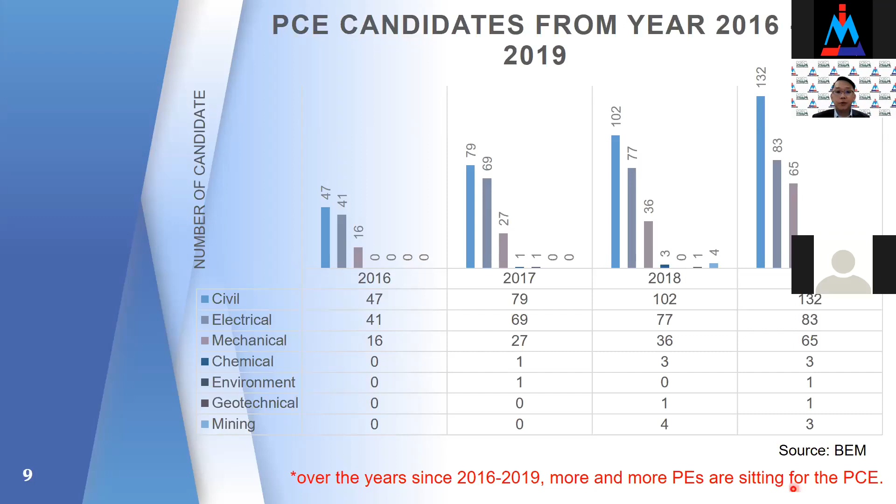Let's look at another set of statistics for the civil PE who passed the PCE based on year. On average, we can see that the passing rate is around 12% based on the results for the past 4 years, namely from 2016 to 2019.

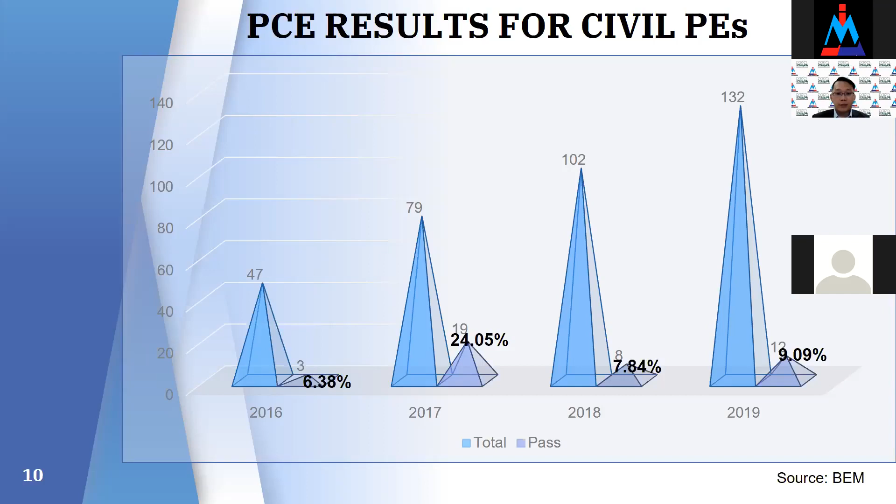That was a very quick introduction to the PCE. Now let us focus on the format and structure of PCE. To sit for the exam, we should fully understand the format and structure. There will be 2 parts in this examination: Part A, the common paper, which is sat by all disciplines, and Part B, the technical paper, specific for the civil and structural PE.

There are 2 papers for each part. Paper 1 has objective questions, and paper 2 has subjective questions. The same arrangement applies for Part B. Candidates need to pass both paper 1 and paper 2 in one sitting. However, the PE can sit for Part A and Part B together or separately. Please be reminded this is an open book exam, but handwritten and loose notes are not allowed to be brought into the exam hall.

This is further detail, a breakdown on the PCE Part A and Part B. The question arrangement is exactly the same for the common paper Part A and the technical paper Part B. For paper 1, there will be 1.5 hours to answer 40 objective questions, and the passing mark is 50%. My recommendation for the 90-minute arrangement: allow 10 minutes to recheck your answers, 10 minutes to revisit difficult answers, leaving 70 minutes for reading and answering the 40 questions, which equals 1.75 minutes per objective question.

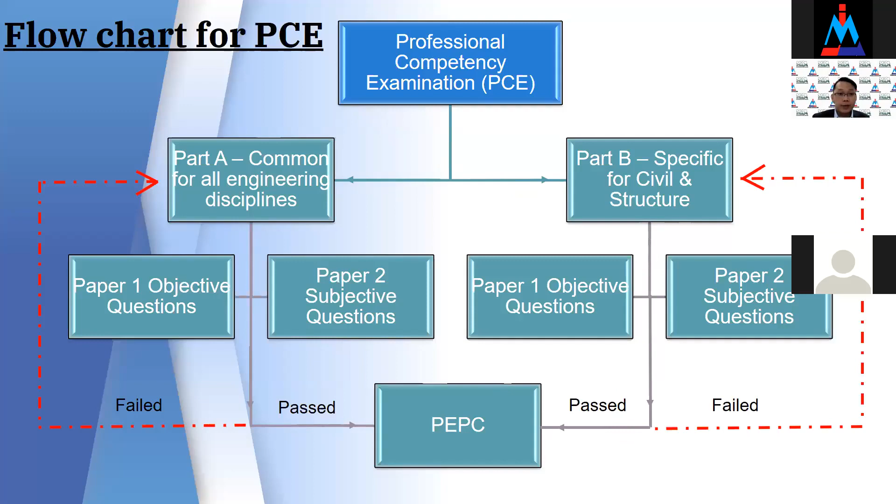Let's see this brief flow chart for the PCE. The passing for Paper 1, Part A and B, is actually independent for Part A and Part B. However, in order for you to succeed and pass the PCE for PEPC, you have to pass both Part A and Part B together. So this is just a quick intro for the format and structure for PCE.

Now we will spend more time on the common paper and the technical paper for Part A and Part B of the syllabus. Let's go through it.

After understanding the format and structure for PCE, let's look at the Part A common paper syllabus. This common paper will test the candidate's knowledge of the laws governing the professions, the responsibility of the profession towards the general public, and the status of professionalism and ethical behavior. There are 7 areas that the candidate needs to be aware of and prepare.

First, the law and regulations governing the engineering profession in Malaysia. Second, engineer's responsibility to society and the public. Third, professionalism. Fourth, knowledge of laws having relevance. Fifth, knowledge of contract laws in Malaysia with respect to the construction industry. Sixth, in-depth knowledge of the functions of the consulting engineer during the various stages of project implementation in accordance with the PAM Model Form of Agreement. And last, the management of the ECP.

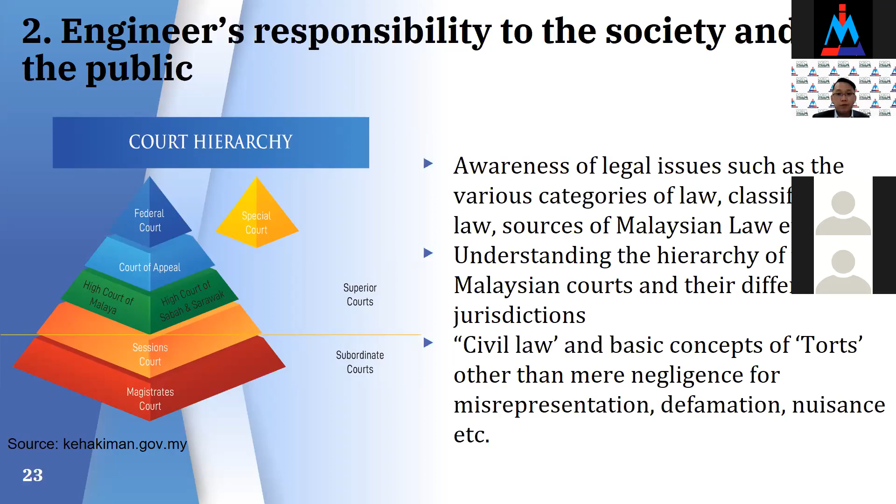In the Registration of Engineers Act, Section 8(1), it is stated that only the PE or ECP shall be entitled to submit plans, engineering surveys, drawings, schemes, proposals, reports, designs, or studies to any person or authority in Malaysia. Hence the professional owes a duty of care.

This duty of care means the standard or level of expertise and due diligence, especially under tort law, for the requirements of the UBBL to the local authority. I believe all PEs should be familiar with the CCC, CFO, OC, and OP.

Cross-reference to other laws in Malaysia has to be made during submission of the plans. This includes, but is not limited to, the Local Government Act, the Town and Country Planning Act, the Street, Drainage and Building Act 1974, the UBBL, Earthworks bylaw, Environmental Quality Act, Factory and Machinery Act especially the BOEC chapter, the SPAN guidelines, SPAN regulations, CIDB Act, and so on.

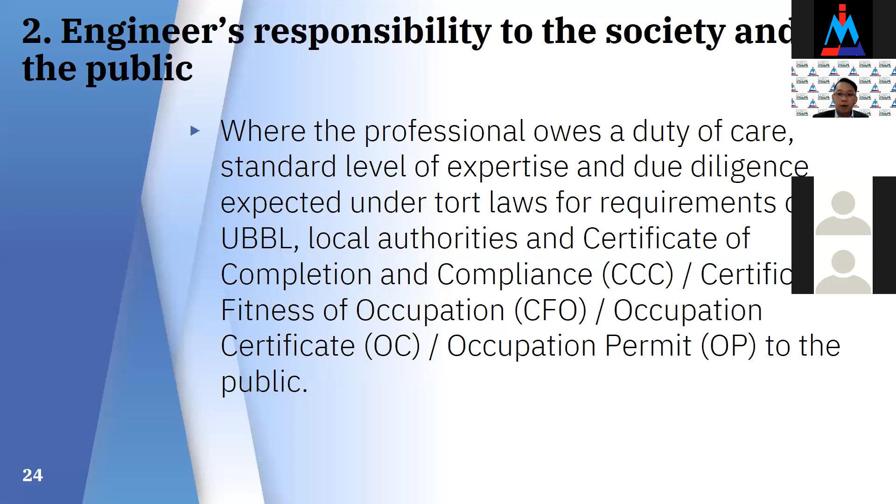There are many more besides these. The sitting PE shall have knowledge of the above laws and acts and practice accordingly.

Subsequently, to submit engineering plans and become a PSP, the Principal Submitting Person and the Submitting Person shall be the PEPC, and must well understand the submission process requirements under the rule of law.

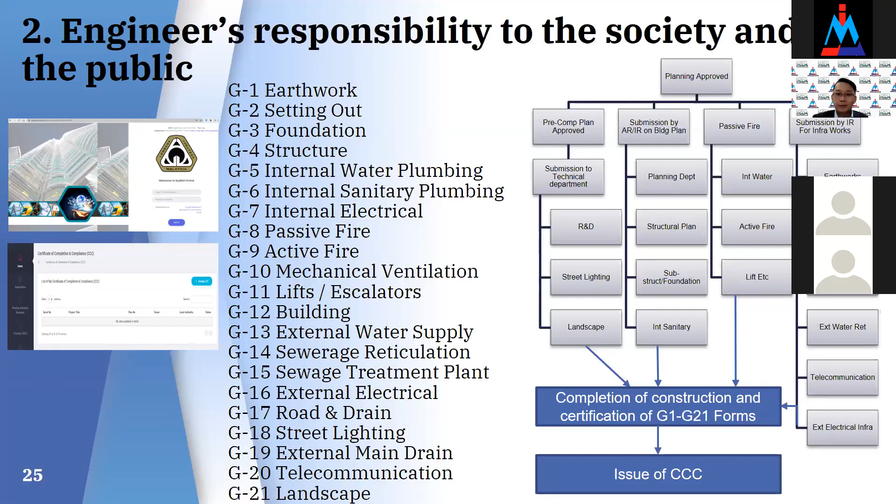Again, on the engineer's responsibility to society and public, he shall be aware that his design liability works within the following factors: risk, factor of safety, code of practice, limitation of the act, and the difference of liability based on reasonable skill and care.

This is a very heavy phrase here: fit for purpose. A reasonable understanding of professional responsibility pertains to the duty of care and due diligence to the client under the contractual and tortious relationship. That's about the second topic.

So let's move to the next topic, professionalism. For the four key concepts of professionalism, we have public interest, client interest, code of conduct, and expert knowledge.

First, on public interest, the work conducted by the PE shall not be deemed injurious to the public interest; that takes precedence. Second, on client interest, a PE shall always hold in trust the interest of his client and treat it as his own interest.

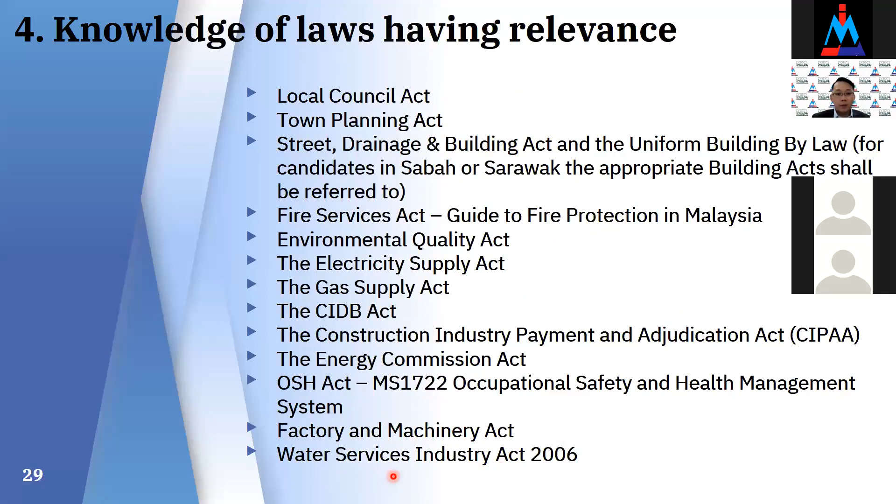These include, and are not limited to, as I mentioned before: the Local Council Act, Town Planning Act, Street and Drainage Act, Fire Services Act, Environmental Quality Act, Electricity Supply Act, Gas Supply Act, CIDB Act, CIPAA, OSH Act, FM, BOEC, and the Water Services Industry Act 2006.

The next topic covered under Part A is contract laws in Malaysia. Handling contracts is unavoidable for a PE, whether it's his own contract with his client or handling the project tender and contract. The basic concepts of contract law are covered under the subjects in all the bullet points here.

Here I need your attention on a recent topic very relevant to contracts, that is the COVID-19 situation in the country. Essentially, due to this pandemic, COVID-19 has created somewhat of a frustration to contracts. I believe the PEs attending today should have some experience with it.

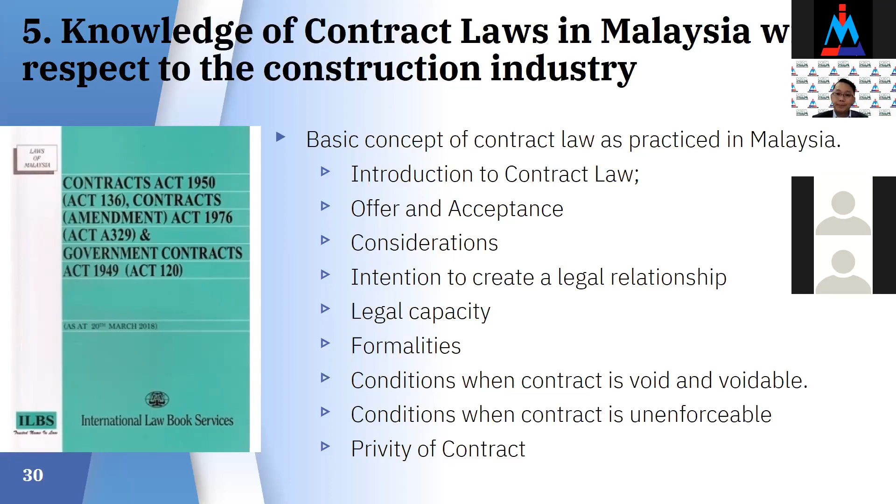Apart from that, a PE shall be familiar with different types of construction contracts, so he is able to understand the differences among them. Only then will he be able to advise his client on the appropriate contract to adopt for his project. The various types of contracts currently practiced in Malaysia include the direct contract, nominated subcontract, direct subcontract, turnkey contract, and design and build contract.

The forms of contract we use include PAM 1998, PAM 2006, JKR 203, JKR Design and Build, and FIDIC. For the FIDIC books, we generally call the FIDIC white book the consultancy contract, and the FIDIC red book the construction contract.

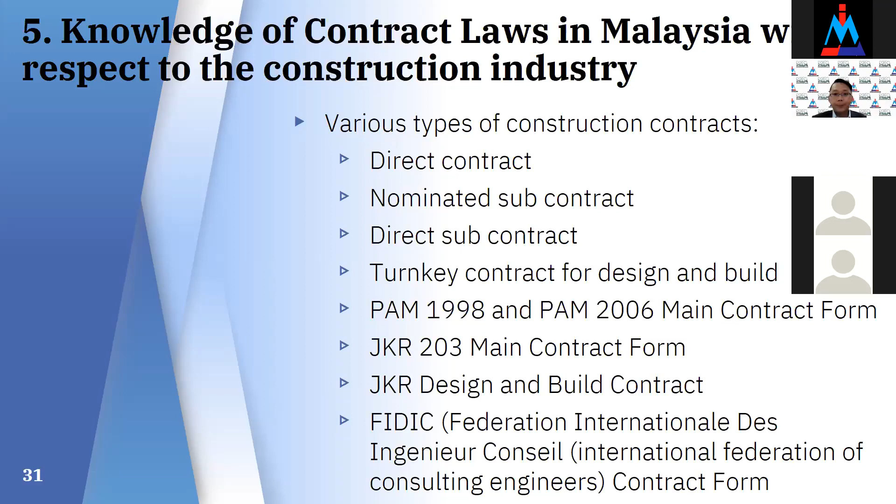Okay, here this will give a summary on the different types of contracts. This is just a simple summary amongst all the different types of contract. I won't go into too much narrative or elaborate detail, but I just want to go through one example.

Say for example, we're talking about the contract for turnkey and design and build. Particular to turnkey and design and build, we can see that on the consultants side, it will be one advisory consultant on board for the design and build project. Contractors, normally we will have one D&B contractor. On the appointment of the consultants, it will be appointed by the contractor, as contractors will bear, in the sense, in the case for design and build, the design warranty.

On item C, the client's expertise required, as you can see across Romans 1 and 2, on the client side relatively only low skill is required, because most of the items will be covered under the design and build contractor.

For the project cost, normally this will be the highest cost for design and build. The type of project, this will be very relevant for large scale projects like railway projects implemented in the country, and it requires special proprietary technologies.

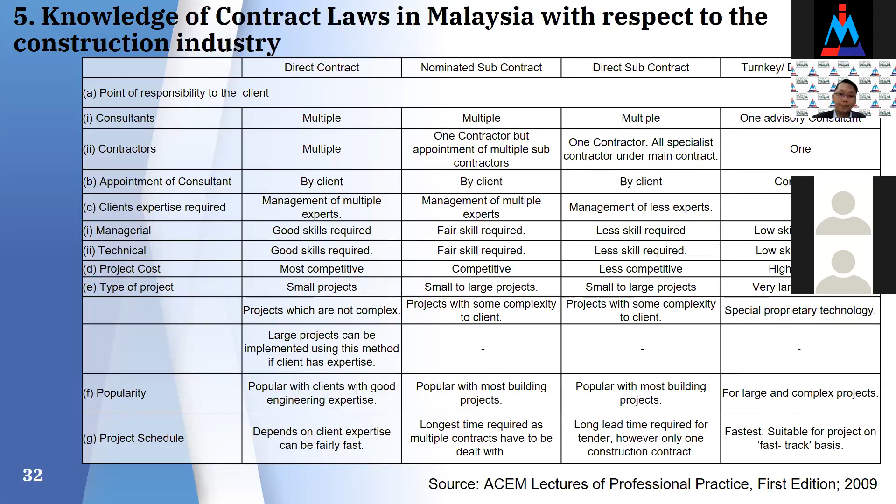Next, we will discuss the function of the consulting engineer during the various stages in the project. When we implement the project, for the consulting engineer, it always starts from the feasibility and preliminary stage.

Then after, we will enter the design stage 1 and 2. Upon finishing the design, we will go to the tender stage, then prepare all the tenders and call for contractors. After this, the tender stage, we will go to the construction stage and the post-construction stage. For the detailed scope of work in each, from Romans 1 to 6, the candidate can refer to the BEM Scale of Fees 1998.

The BEM Scale of Fees 1998 outlines the basic professional services for the various stages shown above. It's worth mentioning that currently there is a BEM working group in the midst of reviewing the revised BEM Scale of Fees 1998, and some amendments are proposed. Hopefully all the PEs, today's PEs, have some knowledge about it and heard about it before. I recommend the candidate put some attention to it and observe the latest developments on this revised BEM scale of fees, the upcoming change.

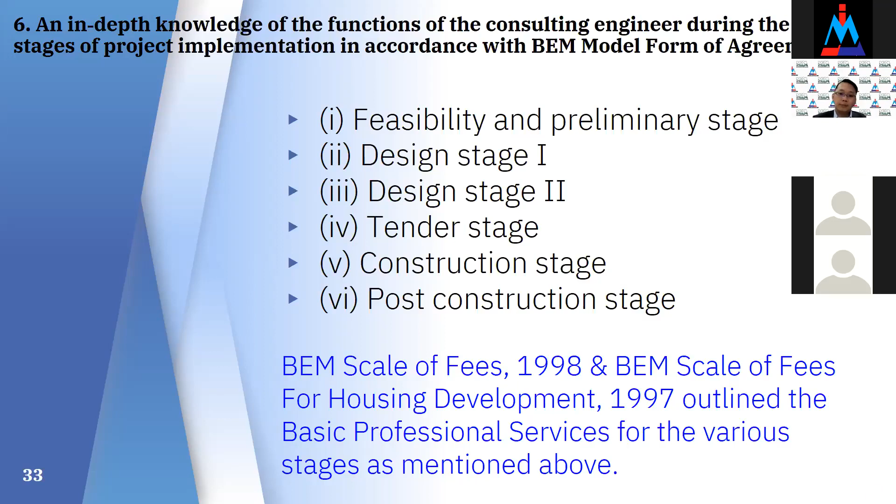This is topic number 7, management of the ECP. This area of concern will be more advantageous to those PEs who are now at management level in their consulting engineering firms. The PE shall have good governance practice in accordance with company acts and regulations, awareness of the implications of penalties involved for violations of intellectual property, methods of charging professional fees and reimbursement items to the client for services rendered in accordance with the revised BEM scale of fees, and basic knowledge of local labor law.

So if you are already at a certain management level or are an SCP, ECP, this will be very relevant to you, and these are the items that you can try to capture.

Now we bring the summary for the weightage of the PCE questions for Part A. On the Part A questions, summarizing for papers 1 and 2, the weightage for Engineers Act and professional practice takes 35%. For common law, local acts and local authority, it takes 30%. Construction and contract laws take 25% by weightage.

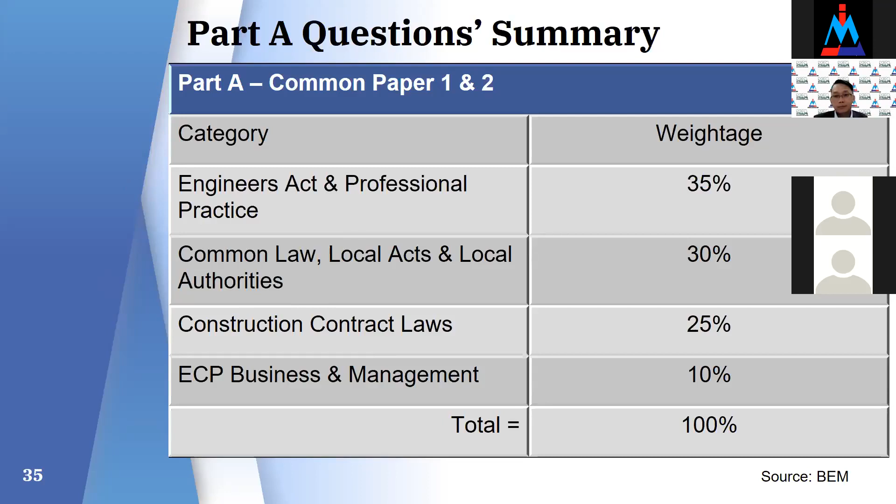The candidate can answer in point form and should try to avoid beating about the bush. Just go straight to the points and write out the answers on your answer sheet. In actual fact, you won't have too much time to spend on a long, naggy answer, so please try to keep it short and simple.

Okay, with that, I think we have gone through this common paper. Now let's cover the second part of the syllabus paper, Part B.

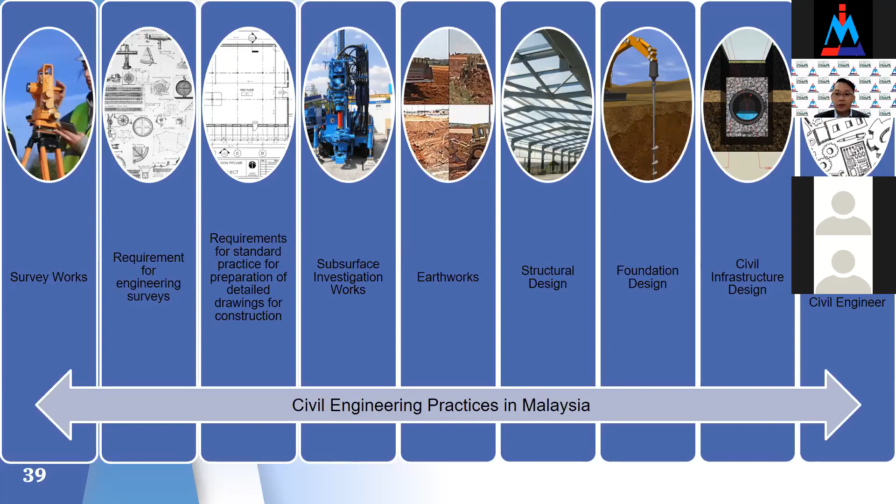First, looking at survey works and the requirements for engineering surveys, almost all projects will kick off with survey works. It's so important for a PE to know the procedure to provide the term of reference for the survey works. All the survey outcomes and results shall fit his design and intentions to carry out the designs later on. Most of the time, if the TOR is not clear enough, we will have to go for the survey works again and again in order to have sufficient information for the design works.

For the survey works, we also have to identify the survey corridor required within your project, the ROW, the right of way, and the type of information to be picked up by the surveyor. Without a good and well-defined survey scope of work and results, it will be very hard for engineers to carry out design, especially for civil infrastructure projects.

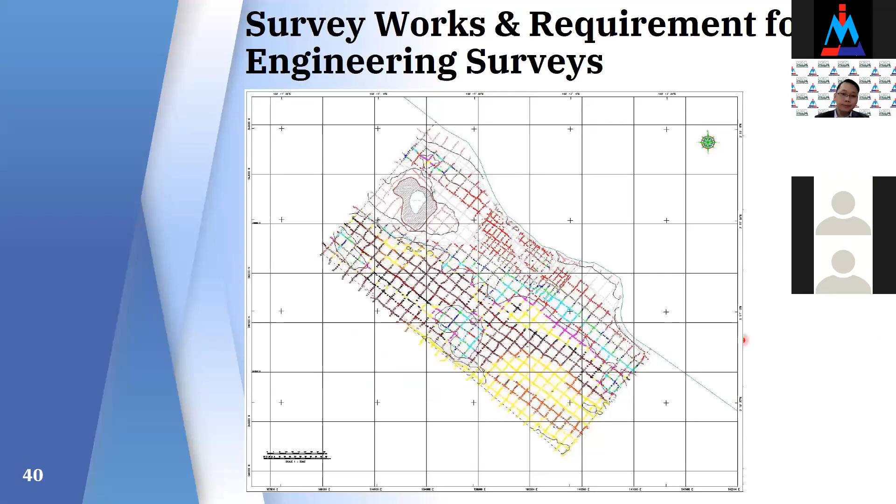Next, the second area is the requirements for drawing preparation. I don't think I need to elaborate too much, as the preparation of drawings for construction, for submission, and all this is a compulsory skill for all PE - the ability to produce drawings. The engineer shall be able to cover and convert his design from the sketchboard to drawing production for site construction consumption.

A good drawing should have the correct scale and be legible when read at A1 size and even A3 size paper. As we see normally at the site, we're just using A3 size paper for construction, so the drawings have to be made legible even in A3 size.

You will have these details, the technical notes in your drawings, the sufficient cross sections for reference. This is quite important when you prepare for your detailed drawing for the constructions. Most of the time the engineers just simply have a plan and one cross section, not enough cross sections, especially for the difficult details. This will let the contractor on site guess, because they have limited cross sections to understand your drawing, your design. This brings some hiccups and hazards to the construction time.

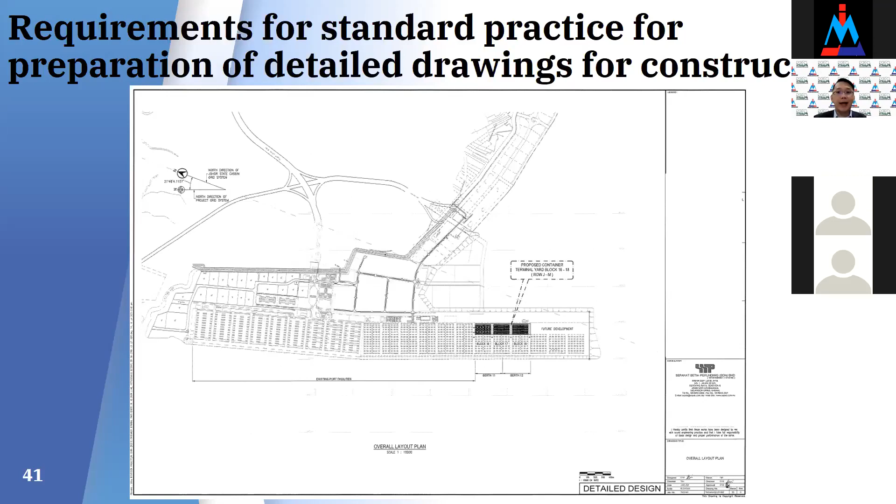On the technical paper, another part you will see is the subsurface investigation work. The third item, after the first one, is subsequent from the previous survey works - we have gotten the survey plan now. The next is the rollout of the SI works. For the SI work, the engineer shall know the ground conditions. It does not matter whether you are a geotechnical engineer, a structural engineer, or an infrastructure engineer - the engineer must know the ground.

Our engineering works is either to build below ground or above ground, hence it is imperative to know the ground condition. For the subsurface investigation work, it starts with the planning of the SI works, which includes the filling works on the embankment, the platform on soft ground, the cut and fill in hillside development, road works on hilly terrains, the earthwork foundation cut and fill on good flat grounds, the foundation design - be it shallow or deep foundations on soft ground - considerations for foundation design on hillsides, foundation design in limestone areas, and the planning.

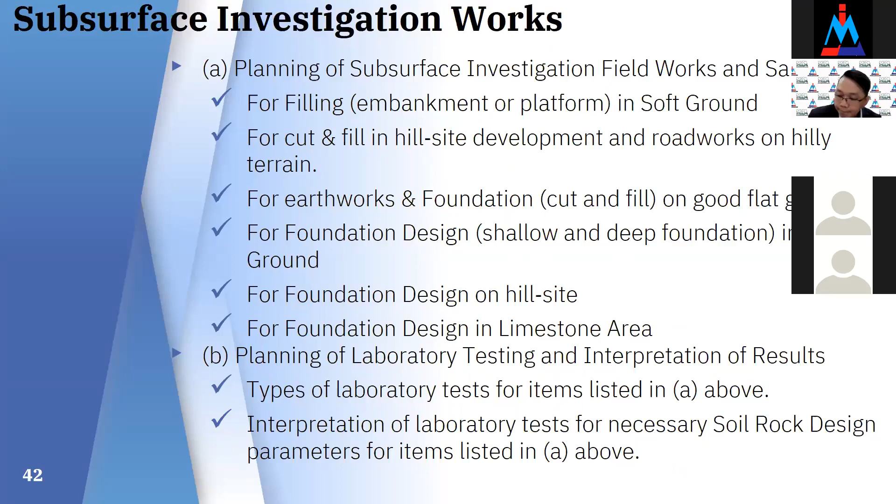Subsequent from the previous, we know we need to have the planning for the SI for our works. Here I want to take one example for the planning of the subsurface investigation field works. As you can see from these plans, this is a road development project for infrastructure projects. We will try to roll out the planning for the SI for the design in the later stage. For the boreholes, we will plan the borehole locations, and then determine the vane shear test, the cone penetration test, then plan the high embankment field site.

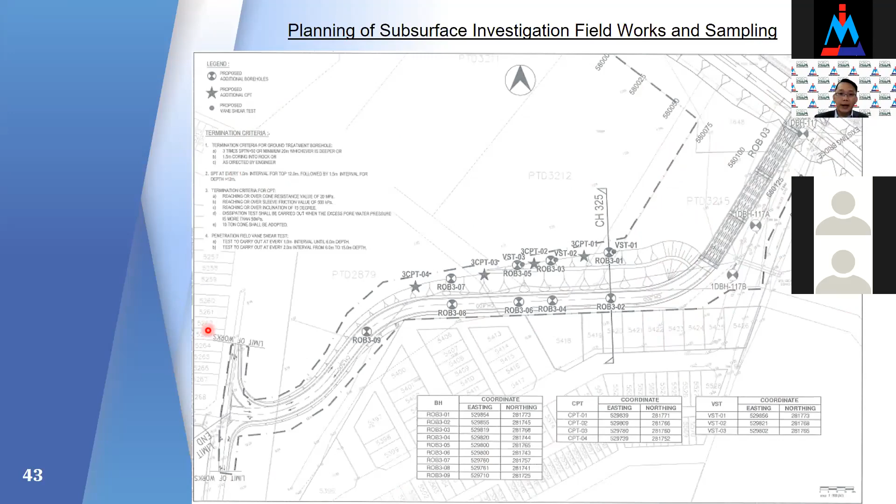And then on the bridge structures here, we have the planning on the SI boreholes, in order to gain and obtain sufficient ground information for the design - for the high embankment geotechnical design, earthwork design, as well as the rollout of the subsurface investigation works for the bridge structures. So this is a good example of how we try to plan our subsurface investigation works.

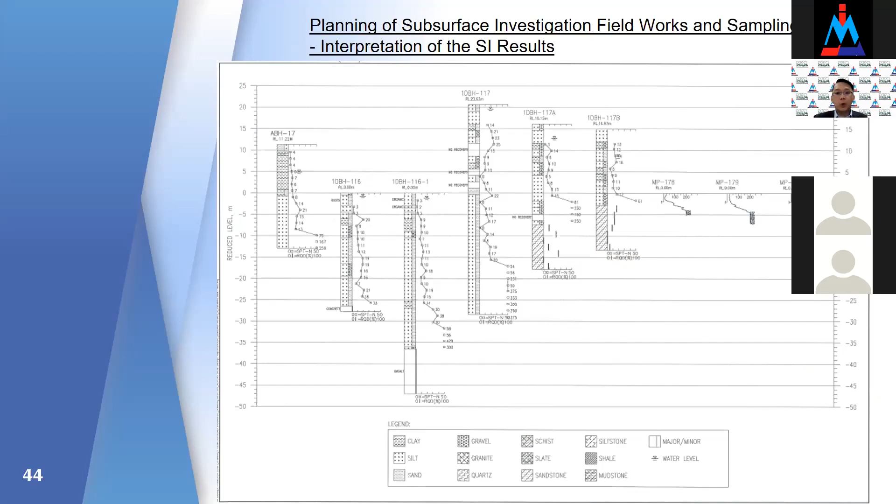After the planning and implementation of the subsurface works, the SI results have come back. From here, this is the standard and common borehole log information. The engineer shall have the ability to interpret the SI result accordingly. In this case, the candidate engineer needs to have the ability to understand and read the borehole results correctly. Apart from that, once the laboratory results are received, the engineer can further base on the boreholes, CPT results, and the laboratory results to carry on the subsequent detailed design works.

Okay, next I wish to touch on the earthworks. For the earthworks, the engineer shall know how to determine the right material for the backfilling works to form the fill embankments. As always, the engineer should know the definition and classifications of unsuitable material, the so-called USM.

Then, what are the compaction requirements for your project's design intention and requirements? Quality control during the backfilling on site requires carrying out trial compactions. The purpose of the trial compaction is to test out the plant, the machinery, and the materials for your backfilling works in building up your fill embankment.

From the trial compactions you'll be able to test your machinery and plants, and for the backfill material, determine the thickness of the loose layer for compaction. In normal circumstances the thickness specified is just 150. But with today's technology and good machinery, with trial compactions, in some cases we'll be able to use a thicker loose layer, maybe 200 or 250, for each layer of compaction.

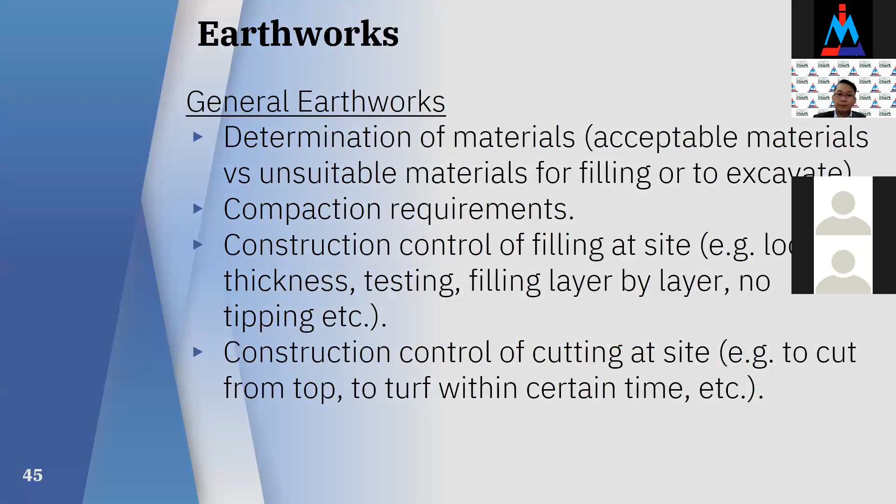During the implementation of the earthwork, we will have the erosion and sediment control plan. I have another separate slide to explain this a bit more, and we'll look at what other measures are to be implemented concurrently.

Upon completion of the earthworks to the required platform levels, we will have to turf the slope as soon as possible. This is to protect your slopes. Here are photos of the completed fill embankment, for example.

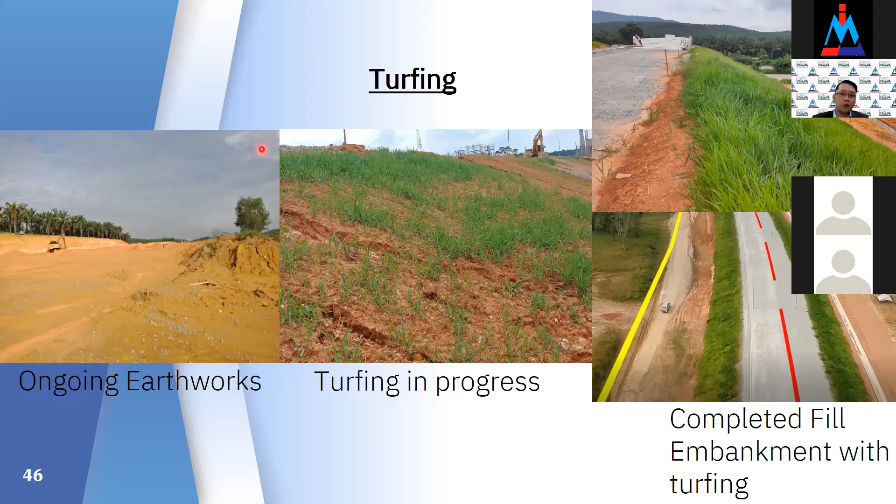Apart from that, I wish to highlight to the engineers that on the earthworks we shall have some other knowledge for the design of earthwork for the hillside. This will include the selection of the subsoil and rock parameters analysis for the design stability for cut and fill, and settlement analysis.

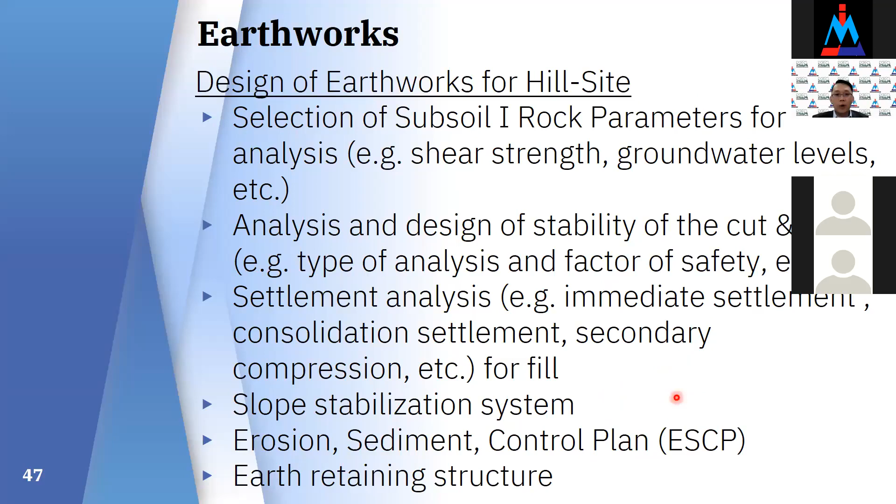For example, going for the analysis on immediate settlement, consolidation settlement, secondary compression for fill, the slope stabilization system, the ESCP, and the earth retaining structures. So this is all well covered under the scope for the earthworks.

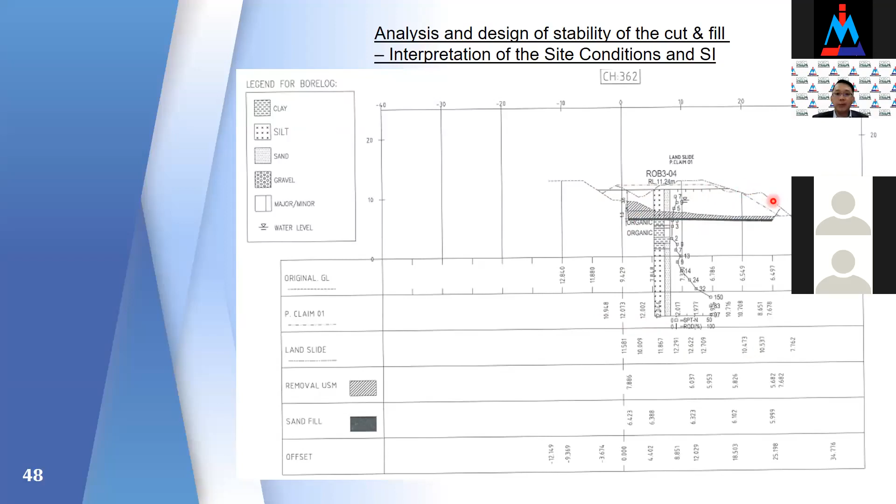Another portion here is the slope stability check that needs to be carried out in accordance with the project-specific factor of safety. So you will have to check on this long-term FOS and the short-term FOS. What are the considerations you have to capture in your design?

The layer of the existing ground obtained from your previous subsurface investigation work is modeled in your geotechnical analysis software. The engineer shall know the parameters for the slope stability checks and ensure sufficient factor of safety is achieved in the design. If it cannot be achieved, we have to think of ways to maybe provide ground treatments and counterbalance and other things in order to give the slope stability with sufficient factor of safety.

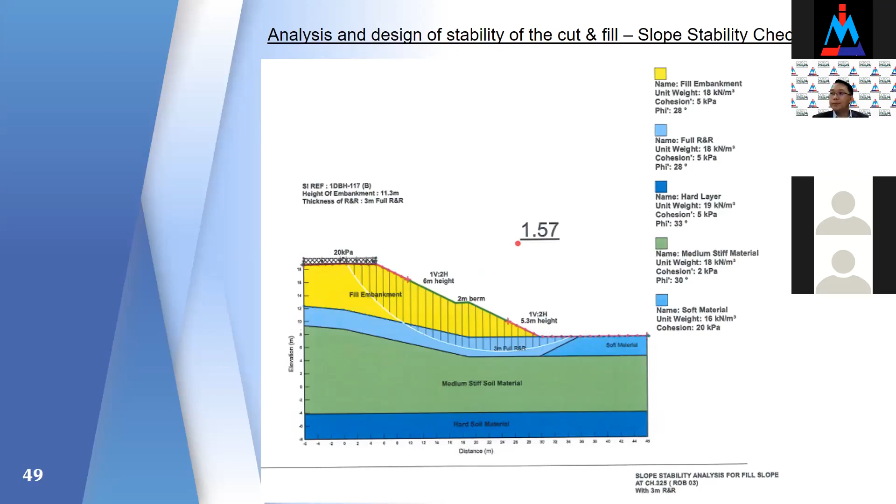Okay, so we will go quick for this ESCP.

On the ESCP, Erosion Sediment Control Plan, the elements consist of sizing your sediment basin based on the project earthwork, the areas and your schedules. Then there's the provision of sediment fencing along the project right of way, ROW, or within your work zone, and the construction of temporary earth drains and check dams to carry all the drainage water and rainwater during the course of the earthworks.

The construction of temporary earth drains, check dams, and provision of a wash trough with heavy-duty interlocking paving blocks at the entrance of the site - and not limited to that, to control dust, routine water bowser runs are required to reduce dust at site as well.

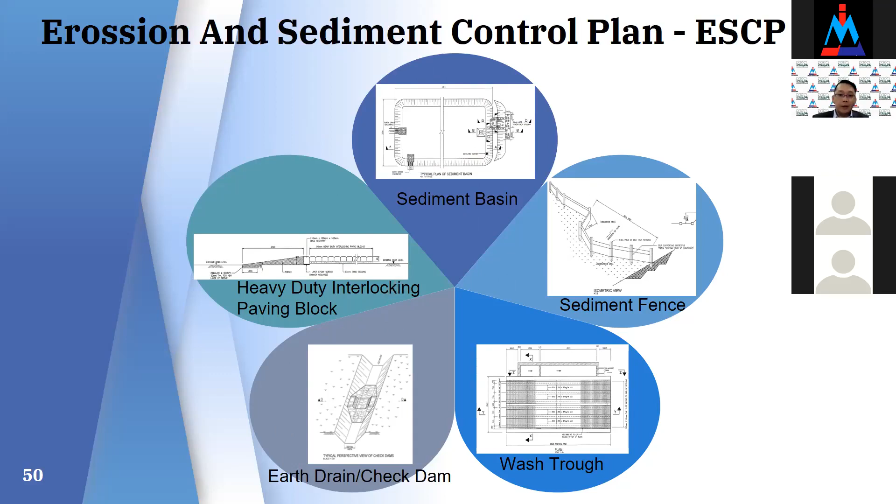All right, that's what we go through for the ESCP.

Okay, for earthwork design on embankments over soft ground, as we can see, the analysis and embankment stability need to be carried out using subsoil parameters such as shear strength, stiffness, and consolidation parameters. For settlement analysis, this includes immediate settlement, consolidation settlement, and secondary compression.

There are various types of ground treatment that can be considered depending on the specific site location - your project's location, the subsurface work giving you subsurface information on the ground, the availability of ground treatment material, and the depth of the subsoil involved.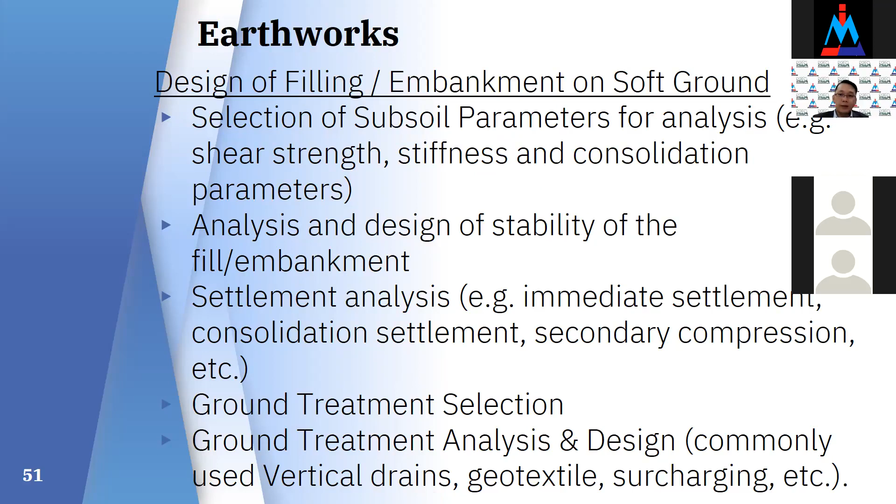Okay, here we can see this is all captured. Then we have the knowledge on ground treatments - how to choose the right type of ground treatment in your design.

Okay, commonly in Malaysia here, we can see these are the 6 types of ground treatment that are very commonly implemented in Malaysia.

Okay, so if you can see, the first will be remove and replace. This is relatively normal for shallow depths of soft soils.

Then we have prefabricated vertical drains, PVD, as a ground treatment. We also have stone columns or sand columns used for certain ground improvement works. And we have dynamic compaction, jet grouting, and lastly, pile embankments.

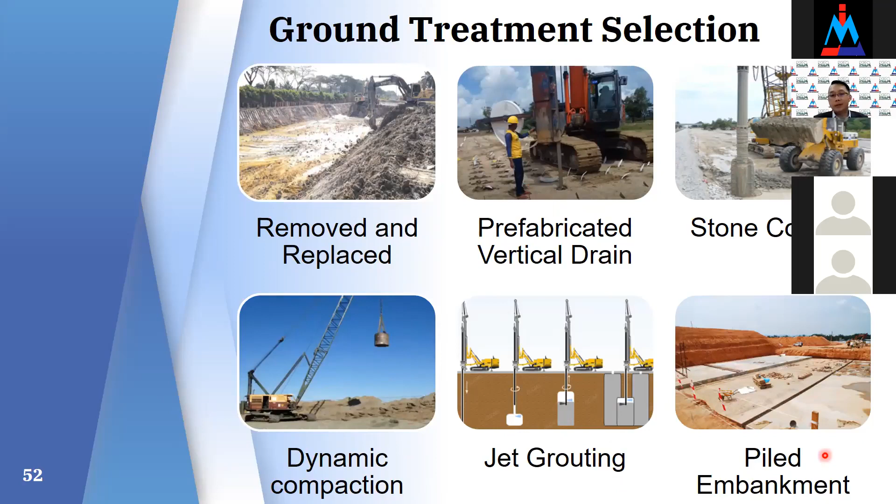Okay, next we will have a look at structures design. On the syllabus for this, the engineer shall have knowledge of load application in accordance to UBBL, and wind load deductions in accordance to MS 1553.

For a structural engineer, he shall have basic knowledge of structural framing, sub-frame analysis, moment distribution analysis, and so on. Not limited to that, the adoption of lateral earth soil pressure for certain specific conditions of soil in contact with structures - say for earth retaining structures - he has to know the procedures and what items need to be checked for his structures.

For instance, for soil-structure interaction elements like retaining walls, it has to be checked for stability, sliding, deflection, and so on. Not limited to just designing for bending moment, rebar, and shear capacity on the shear links and such things - there are other criteria and elements that you have to check at the same time.

The fundamental mechanics and static knowledge for structural analysis is a must in these structural disciplines. Most of the time, the structural engineer is assisted by structural software in the office, like STAAD Pro, Tekla, Midas Civil, Lusas, SEF, and many more others.

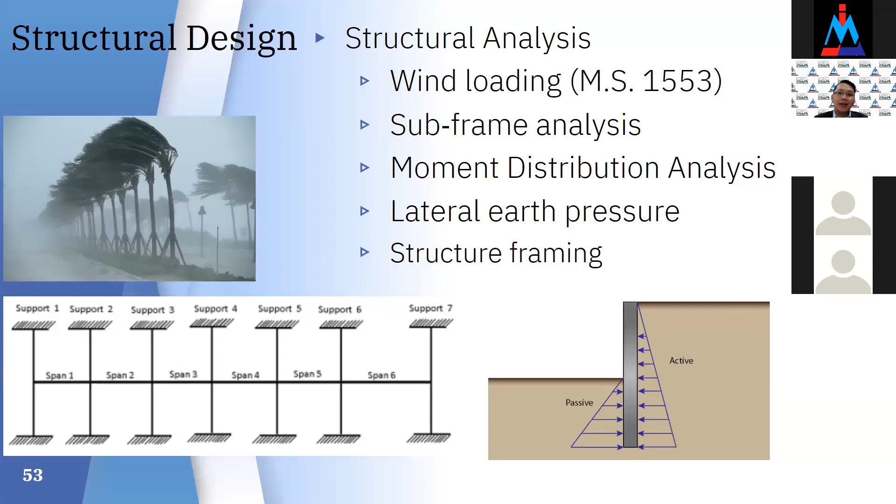However, in these circumstances, for the PCE, I really recommend candidates go back to the basics. You have to pick up manual calculation. As you should notice and understand, you won't be provided any computers or software during your PCE - what you have during your PCE is your calculator only. So do take note of that, go back to the basics, and start practicing your manual calculations.

The candidate will need to have the concept wise on the design for reinforced concrete design, which we call RCC for short. The PE will test on the concept and feasibility, preliminary sizing, framing, and load transfer mechanism of the structure from your top superstructures to the bottom of your substructures. Here, the PE shall have a good basic understanding of those important parameters.

You need to have the knowledge on the span depth ratio, the minimum reinforcement, minimum numbers of rebar in the square column, in the circular column - all these very basic things that you can refer back to any of your design codes.

The design concept for the solid slab and flat slab - what are those extra considerations and differences between the structural elements? And why do you choose your structural framing for that reason? So on the PE, it will test you more on concepts that you can pick up quickly, and they won't give you too complex a question on that. It will be more on concept and simple questions.

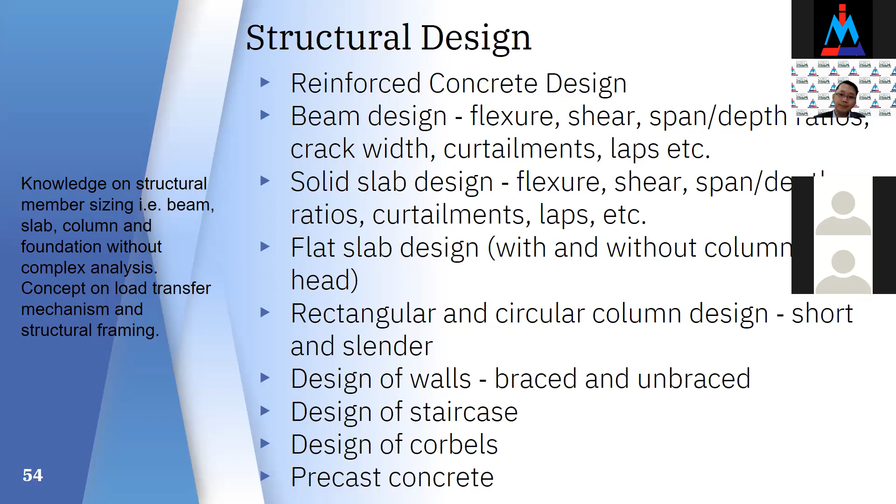We are still with the structural design. In this design, we are talking about the prestressed concrete. Engineers shall have at least an idea of prestressing and what is so-called prestressing in prestressed concrete, on the conceptual wise.

If you can see the chart on the left-hand side, it shows a typical Magnel diagram. If you are yet to know what is the Magnel diagram, don't worry - after this session you can try to search on it, on what is the Magnel diagram. Basically, from the Magnel diagram, we can roughly check on the permissible prestressing for the beam to the effectiveness of the top and bottom modulus that you recommend in your design.

So you have a quick check on the sizing and the member and prestressing force that can be designed for within the sections and to the loads that you are designed for.

On the other hand, engineers shall be able to name the pros and cons between the RCC and the prestressed design. You need to be able to differentiate what considerations are taken into account in RCC design and what considerations are taken into account during the design for prestressed concrete.

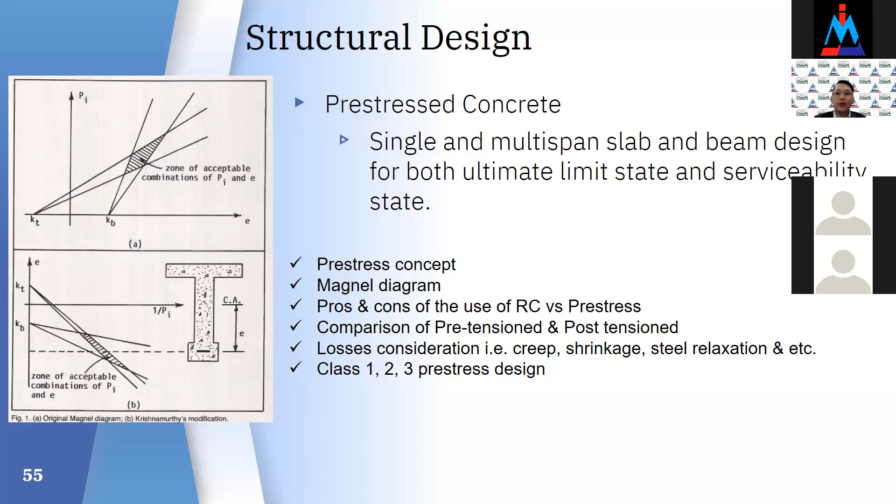Next, we are still within the structural design. In the structural design, let's look at the water retaining structures. For water retaining structures, the candidate shall prepare himself for the effect due to hydrostatic force to the RC design.

The other extra consideration in watertight structures will be the control of crack width. So for some engineers who are familiar with it, they may not be that familiar about crack width control and crack width design.

So here I recommend you to really have a look on the crack width design.

Another thing on watertight structures is the material that we use. For example, for the concrete structure used for watertight structures, we can consider putting in pulverized fly ash, PFA, into your concrete mix. This is a material selection you can opt for during the watertight design, where you define your own material.

Another portion on watertight structures is the selection of waterproofing material and the locations of construction joints and contraction joints, so that you minimize the weak points that create leaking in your watertight structures. Apart from that, a proper construction methodology and joint detailing has to be specified in tandem. This is very relevant to watertight, water retaining structures design.

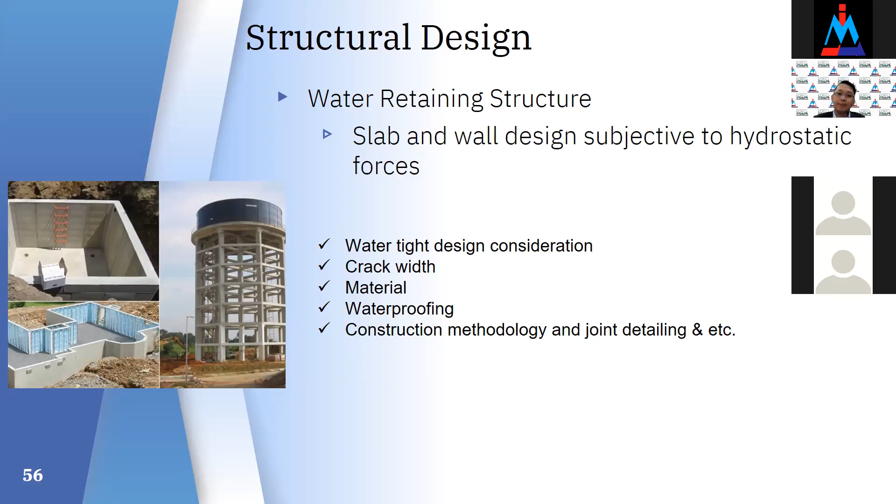Not limited to RCC and prestressed concrete, we also have to capture structural steel in the structural design. The engineer shall have knowledge in the selection and design of sections, such as universal beams (UB), universal columns (UC), circular hollow sections (CHS), all types of hollow sections, angles, and plates. The analytical analysis on steel truss and design also has to be studied. Another important design element in structural steel is the connections.

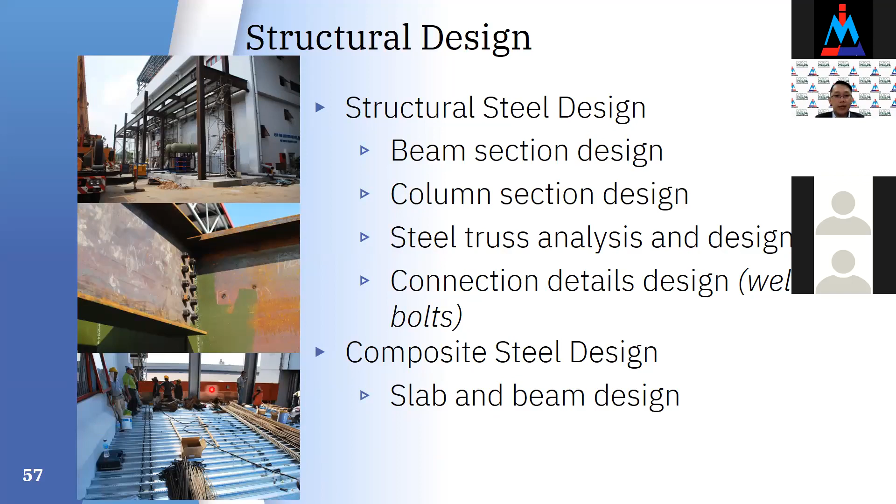The connections detailing, as you can see from here, for welding design and bolting design, you must have certain knowledge on that. This is as well as structural steel framing, the load transfer mechanism from your slab, your beams, to your column, to your foundations. In some circumstances, composite steel design can be adopted, like this composite design on the slab, and I would recommend the candidate study and prepare for it as well.

Now we go to another common chapter within the structural syllabus, which is timber design. Most of the time, timber design is adopted for temporary works, for example, shoring and formwork design. The candidate can study and prepare for it accordingly.

Candidates should have knowledge not limited to just timber design. Now we have other elements to be captured under structural design, which is knowledge of the statutory requirements in the UBBL for building structures, especially on loading requirements and fire resistance requirements. These are the basic knowledge that we need to possess. For the PE structures question, I strongly recommend you have in-depth knowledge and really familiarize yourself with the UBBL.

Shazwani, can we just have a 3 to 5 minute break? I see we're almost at an hour, so can we have a 5 minute break for the audience for a toilet break? Yeah, sure, all right. So now I see it's 1:06, can we come back at 1:10? Yes, okay, alright, thanks.

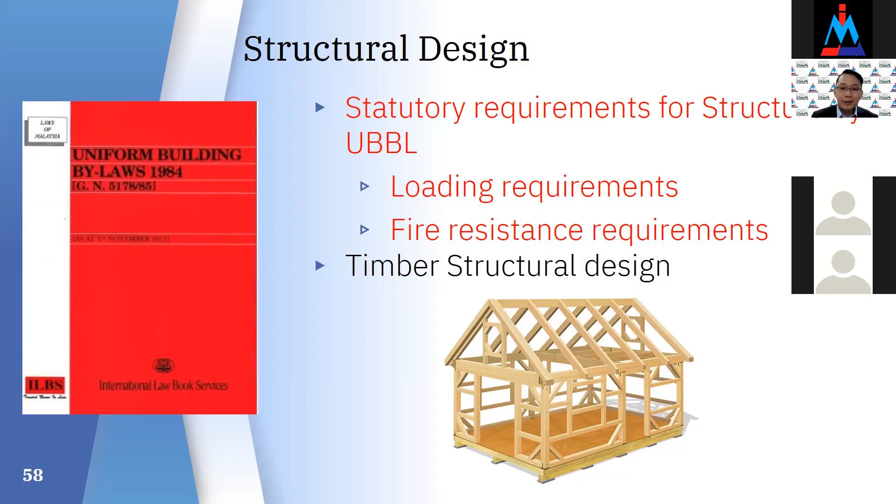Hi Shazwani. Hi. I believe now it's about the time, 5 minutes, okay? Okay Stella, you can continue the presentation. All right, so can we continue? Okay, so there was a quick 5 minute toilet break. Okay, let's continue to the next.

We are still in Paper B for the civil technical paper. Here the subject I want to further highlight is foundations design. From the start I really recommend the engineer should know the ground, as the ground condition is very relevant to all kinds of structural works. Having knowledge in subsurface investigation work is essential, and you need to understand the ground parameters, the SI, and all related information obtained from your SI works.

Okay, now we will move on to foundations design. In these structural chapters for foundations design, engineers shall have knowledge on pad footing, strap footing, raft foundations design, and pile cap design.

For the pile cap, the candidate should have the knowledge to choose either bending flexural theory or truss analogy theory for their structural design. You need to be able to differentiate what is different, and which approach to use for bending flexural design versus truss analogy analysis for your pile cap. The sizing of the pile cap, and then the checking - you need to know the differences between bending theory and truss analogy theory, as the detailing for both is very much different. That's why you have to study this.

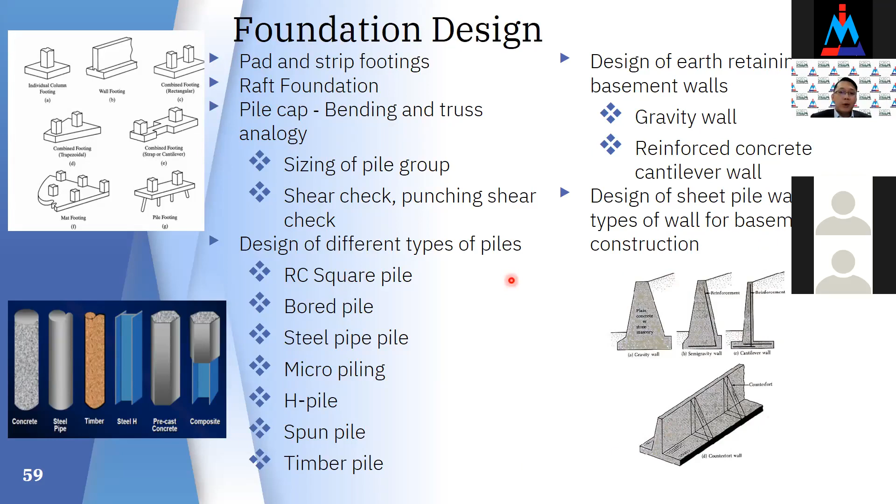Next, we'll go to civil infrastructures design. This covers chapters for water supply design according to SPAN guidelines, sewerage design, road design, and drainage design for housing and building developments.

First, we go for water supply design. The major guidelines to follow will be the SPAN guidelines. An engineer should be familiar with the requirements in these guidelines. Candidates will need to have the knowledge to estimate the daily water demand based on the SPAN guideline for your developments.

The next topic is the water reticulation system. The engineer shall know how to check average flow, fire flow, and hydrant flow. All of this makes it very relevant that you need to fully understand and follow the SPAN guidelines, especially for daily water demand estimation. Then, the source of water supply tapping point will be covered in the next slides.

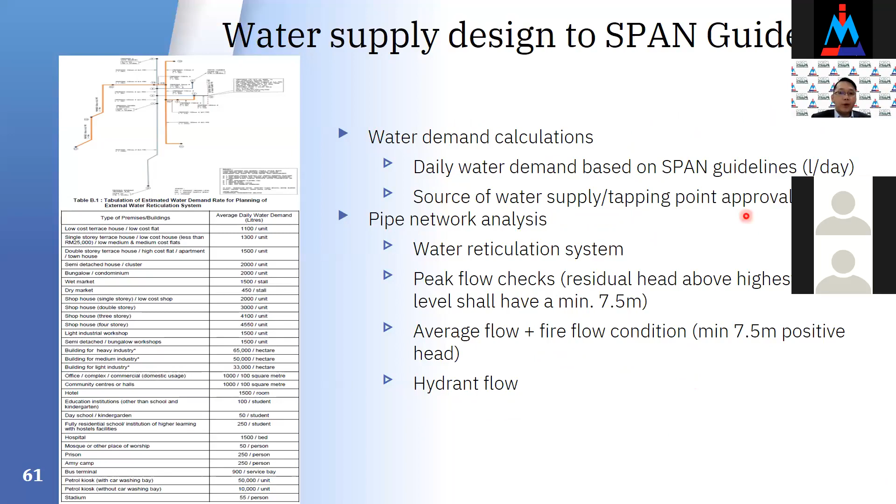The first part covers design, not limited to the design for water supply. The engineer, on this part of water supply, shall be familiar with submissions to the water authority based on SPAN requirements. As you can see here, we have all these hydraulics calculations where the engineer checks the water rate, based on your BWL, your HSL, and all these things to maintain a certain pressure head in your hydraulics design for water supply.

Here is the second part on submission - more relevant is the jadual ketiga, the third schedule. The third schedule covers applications for the source that you request from the water authority in the respective state, because different states have different water authorities. The fourth schedule will be the application for approval of plans. Normally, we submit our external water reticulation layout for approval.

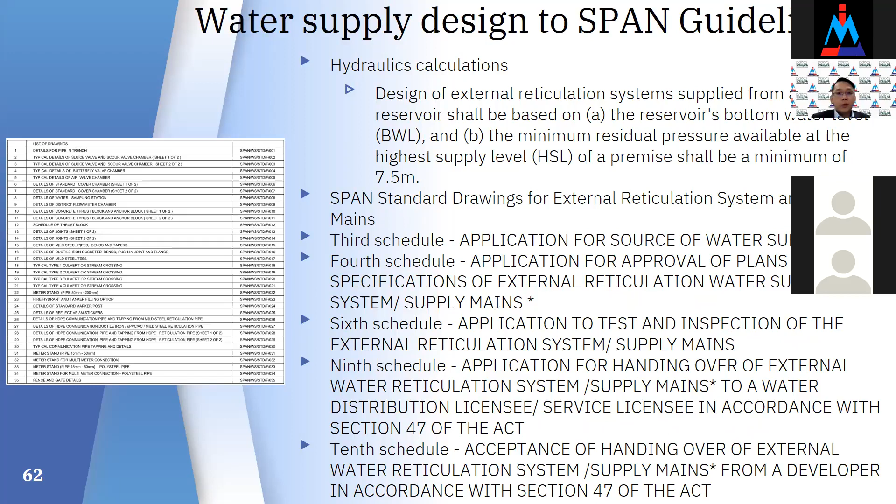Sixth schedule will be the tests and inspections of the external reticulation system. Ninth schedule, jadual ke-9, application for the handing over, and schedule 10, acceptance and handing over of the external water reticulation systems and the supplies of the mains. So that covers the water design.

Another element in the civil infrastructure designs will be the sewerage design. For sewerage design, engineers need knowledge of the Malaysia Sewerage Industry Guideline, MSIG. This guide, not limited to that, has a total of 5 volumes, 1 to 5. In tandem, there's another standard you need to familiarize with during your sewer design, which is MS 1228.

The design of the sewerage will cover flow estimations, alignment control, your sewer pipeline alignments, the location and spacing of your sewerage manholes, your pipe velocities, the minimum gradients to apply, and so on. Engineers shall have to know how to calculate population equivalence, your PE calculations, based on the MSIG.

And then depending on the kind of development, there are guidelines in SPAN and in the MSIG that you have to follow in your estimation of PE.

For your info, in the year 2019, the first question was a sewer infrastructure question, where the candidate was required to review the sewer pipeline alignments given, and provide calculations and comments on the gradients, the alignment, and related aspects in order to answer this technical subjective question.

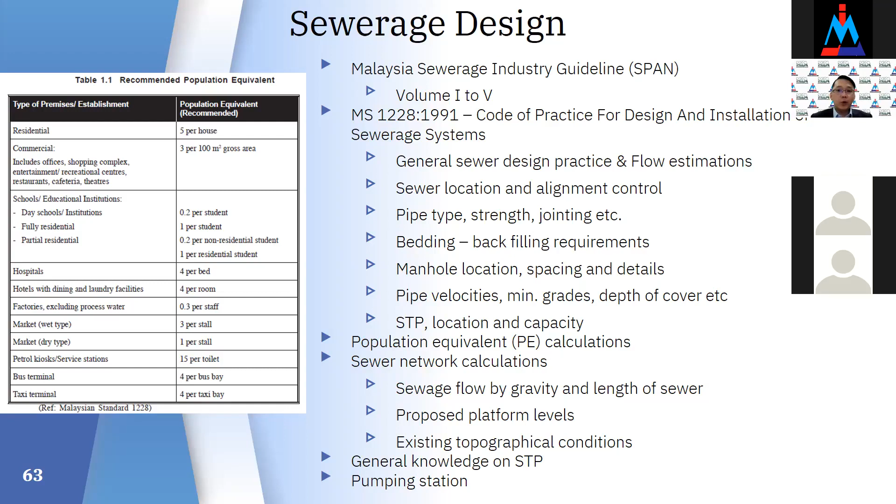Next, we shall cover road design. In roads or equivalent highway design, the major design reference will be the ATJ, Arahan Teknik Jalan. On the geometry side, the major references we follow are ATJ 8/86 and the REAM guideline 2, REAM GL2, for geometric design.

The engineer shall have knowledge relevant to super elevation, SE - how we control the SE and why we need it. Also the general control of vertical and horizontal alignment, your vertical grade and horizontal planes, the plan curve, and related knowledge required.

This includes junction design, covering your acceleration and deceleration lengths - the considerations, the length, how you control and design for AC/DC. Not limited to that, it also covers your merging length, diverging length, and so on.

Another daily task for the road engineer is keeping a balanced cut and fill in the design. The engineer needs this knowledge to obtain the most optimized design in alignment selection. Normally you'll have alignment options A, B, C, D, and so on, and it's the responsibility of the road engineer to select the most cost-beneficial, optimized option throughout the alignment choices.

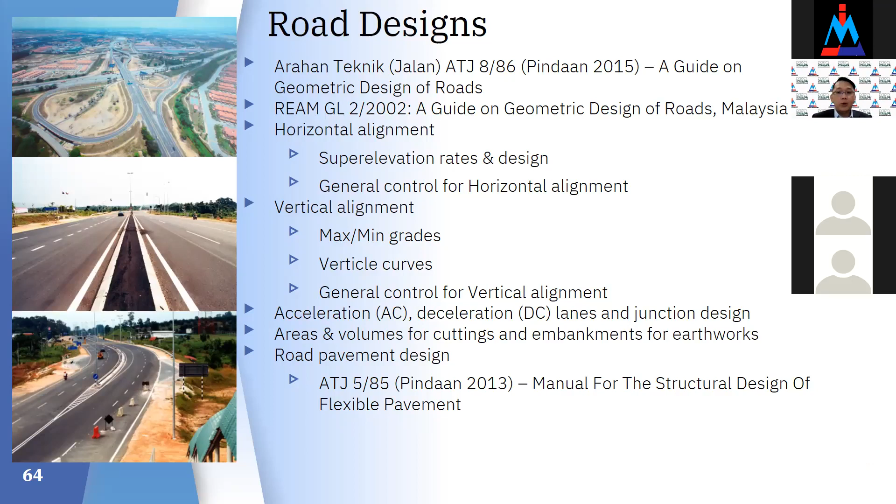Next will be drainage. In drainage design, the engineer shall familiarize himself with MASMA - the Manual Saliran Mesra Alam from JPS. The requirements and procedures, the hydraulic procedure (HP) of drainage design - the drainage engineer really needs to seriously familiarize himself with it.

He needs to prepare the hydraulic design calculations based on the catchment, your ARI, considering the contour of the developments, the platform of the developments, or even past historical flooding events and levels - all these in consideration for the design.

In the MASMA design, MASMA 2, there is a further requirement on the on-site detention requirement, whereby the engineer needs to have certain knowledge to read on, especially the sizing of the on-site detention, OSD. I do remember again in the year 2019 suggested questions, second question.

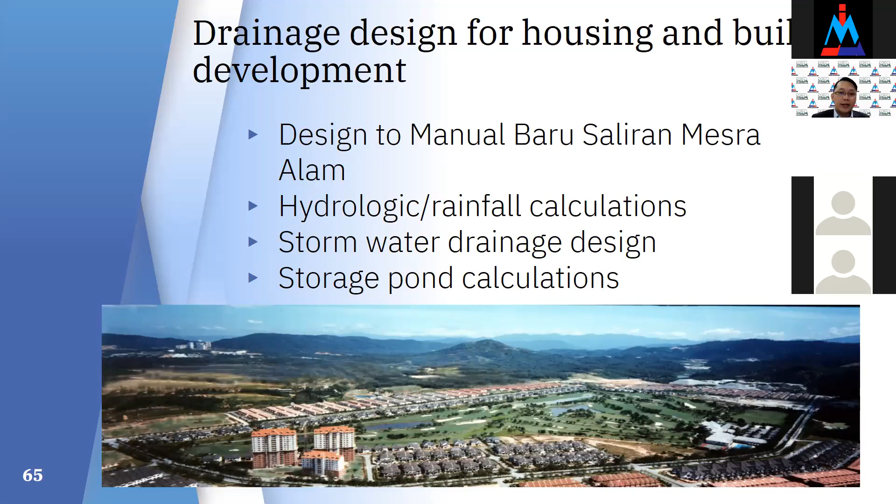The last portion of the technical paper syllabus will be regulatory practice and submission procedure. This is the daily work of a civil engineer, doing the authority submission. Every day we are doing authority submissions.

I will recommend for the submitting person, the SP for civil works or building works, to really know the procedure for plan submission, structural plan submission, infra plan submission, in accordance to the UBBL, earthwork bylaw, Street, Drainage and Building Act, and so on.

You need to really know the procedure starting from plan submission, the approval process, engagement with the authority, and lastly after construction, issuance of the CCC. In some circumstances, the civil engineer can submit as the submitting person, so you need to have relevant knowledge in this area as well.

For those EMS qualified companies, the measures and considerations to take into design and construction will refer to the environmental quality act. The engineer shall have knowledge on this act as well, and how to deal with scheduled waste discharge and control to mitigate air quality issues.

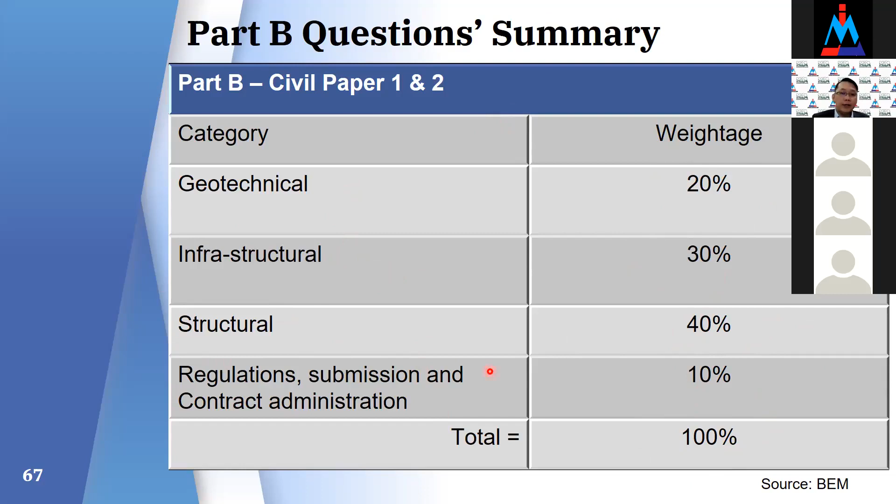As I can recall and remind you of my earlier remarks, each question on the objective section normally needs to take less than 1.75 minutes.

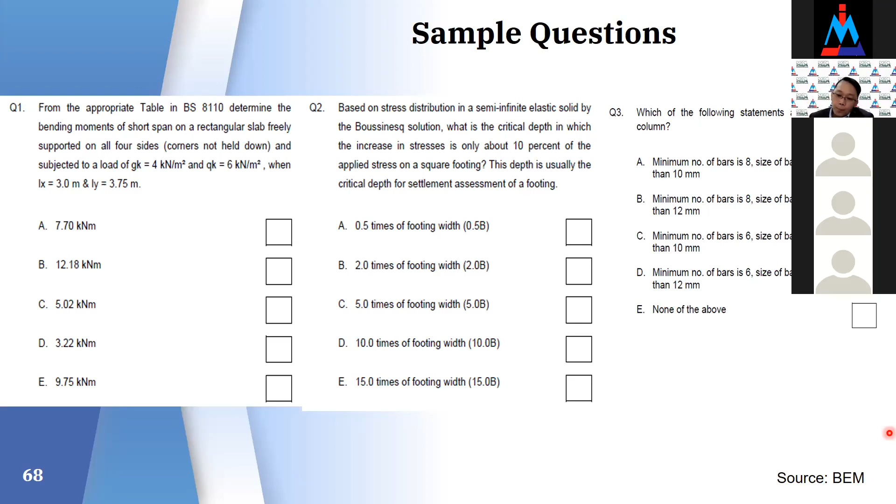The next will be the subjective question. Again, for the subjective question, it will always be asked as a condition, a situation-like question. Meaning to say, you are given a problem, a situation, and there are details lined out and stated for you, and you are required to resolve those problems with a technical answer.

Your answer will normally be just like our daily work, the constraints and problems that you face day to day. And of course, with much good exposure to the full range of civil engineering works, the PE will have the ability to answer. I believe all these questions are based on live examples, real cases from the question maker, making the question for the PCE.

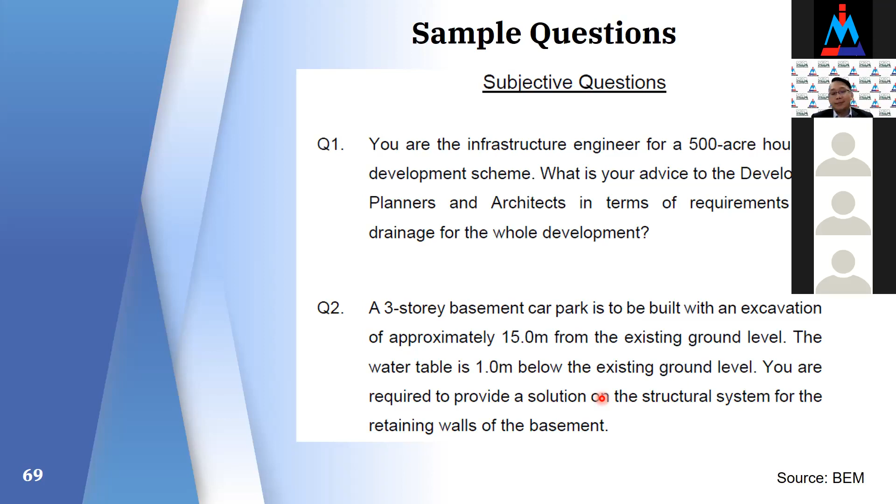Okay, so next I would like to share. We have gone through so much, we spent so much time on the syllabus for Part A, the common paper, and so much time to go through Part B, the technical paper. Let's look at the preparations. How do we prepare ourselves to sit for the PCE? Hereby, I would like to share some of my personal experience with the audience today.

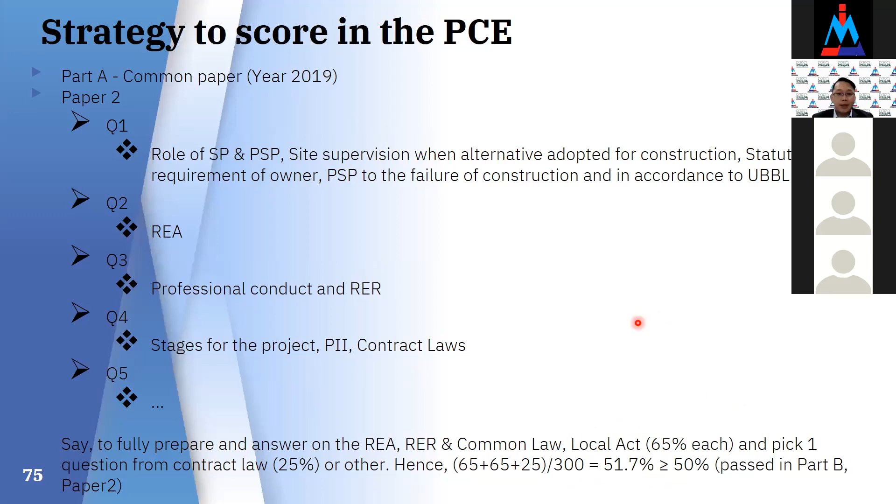Similarly, for the Civil paper Part B, Paper 1 is the objective question covering 4 categories across subjects - please fully prepare for it. Since it's objective with answers to choose from, it's normally not made too difficult. But the difficult part comes in Paper 2.

Normally there are 2 infrastructure questions, 2 structures questions, and 1 geotechnical question asked. From my memory of the 2019 Civil Paper 2, as I mentioned earlier in my slides, Question 1 is on sewerage design.

Question 2 is on infrastructure development planning - water demand estimation, population estimation for sewerage, and drainage design. Question 3 is a structures question asking you to provide structural framing and quick member sizing, explaining the factors you considered. This splits into 2 parts.

The first part is structures framing and member sizing, and part 2 is prestressed design. Question 4 is RCC design - reinforced concrete design - also with 2 parts. The first part is straightforward, on simply supported design and so on, which shouldn't be much problem for a structures engineer. The second part is on precast design.

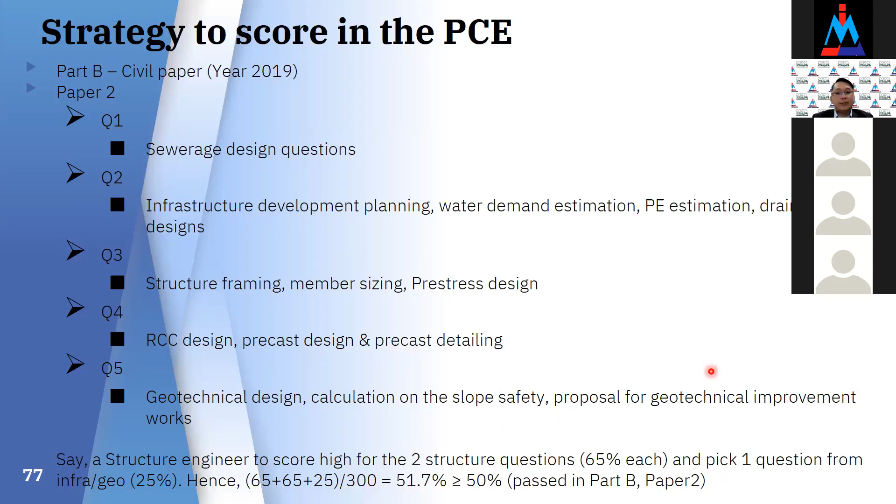These are some quick tips I can recommend to candidates. Frankly, throughout my whole preparation process for this exam, I set out to acquire new skill sets and knowledge, not just limited to what I knew before, but as an enhancement of myself across the wide spectrum of civil engineering.

Since the syllabus is posted, it's like a checklist for me - I go through the syllabus and check off my knowledge, one by one, to cover my shortcomings. This applies to technical knowledge, project management knowledge for the ECP, managerial aspects, and more. The most important part for the PCE is remembering it's not limited to what I know, but what I ought to know.

On the other hand, I also gained more exposure to regulations and rules of engineering practice, and a better understanding of PSP and SP responsibilities, liability, and accountability.

With that, I'd like to come to the closing. I wish good luck to all civil candidates sitting the PCE this year. Remember, PCE may be difficult, but it's not impossible. Good luck to you all, and thank you.